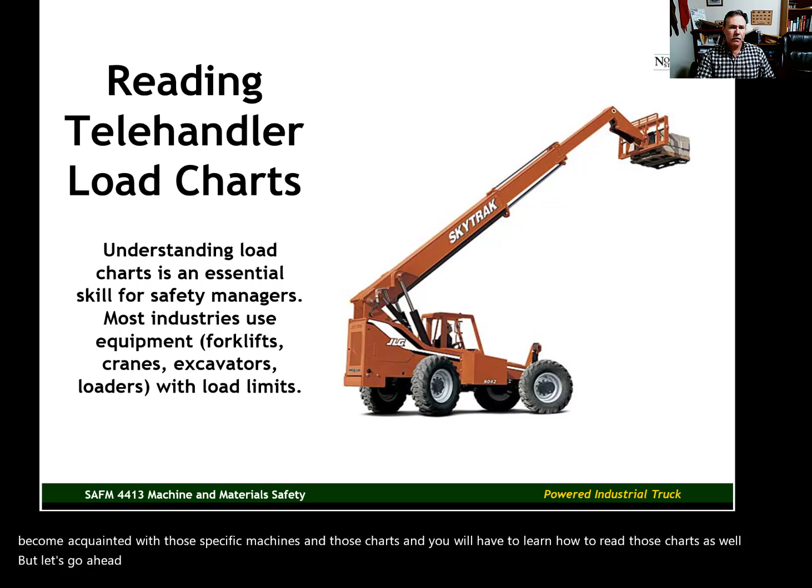Once you're working as a safety manager, you will be around these types of machines, and you will become acquainted with those specific machines and their charts, and you will have to learn how to read those charts as well. But let's go ahead and take a look at the chart for this particular model of forklift.

We're dealing just with the SkyTrak 8042. Different models of SkyTraks will have different charts, and different manufacturers will have different charts. We're just working with the SkyTrak 8042 charts.

The load chart will tell us how much we can lift based on the angle of the boom, how far the boom is extended, what the reach is with the boom, and how high we're lifting the load. These 4 variables determine the capacity of the machine.

We can also use the chart to identify the maximum lift heights or horizontal reach distances with a particular load weight. Now let's say we have 5,000 pounds and we want to know: how high can we lift that 5,000 pound load? How far out can we reach with that 5,000 pound load? We can use the charts to help determine what the limitations are going to be with a particular load weight.

And like I've already said, there are different charts for different machines, but most of them look very similar to one another, and they're used in basically the same way.

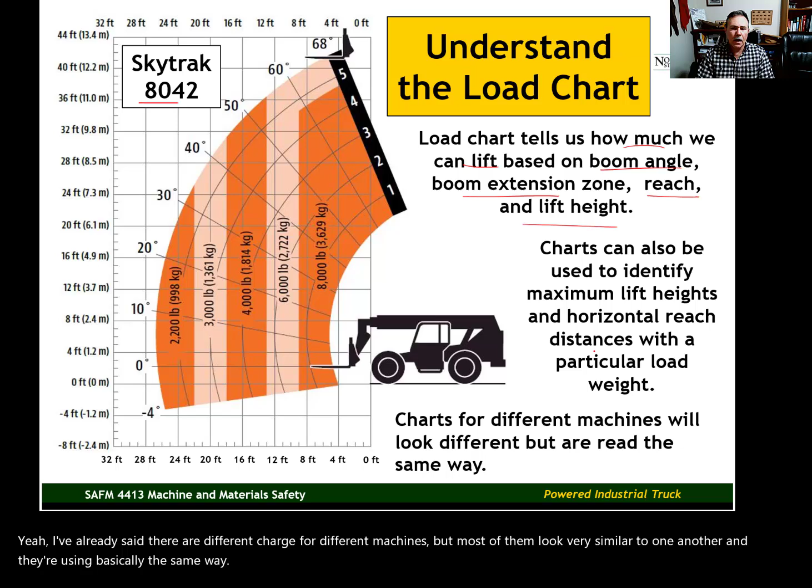Let's take an even closer look at this particular chart and break it down into the different components. In yellow, we have the boom angle—that's the angle of the boom relative to the ground.

The boom angle for this machine can range from 68 degrees maximum all the way down to -4 degrees as a minimum boom angle. A lot of versatility—again, it's -4 to 68 and anywhere between those two extremes. Our boom can be set up anywhere within that range, which makes this a very versatile machine.

The reach of the machine, the scale goes from 0 feet to 32 feet. You don't have that much reach, even though the scale goes out to 32 feet. The maximum reach with this particular machine is going to be about 27 feet. But again, even 0 to 27 feet also makes this a very versatile machine. Anywhere within this range is a workable reach distance for this machine.

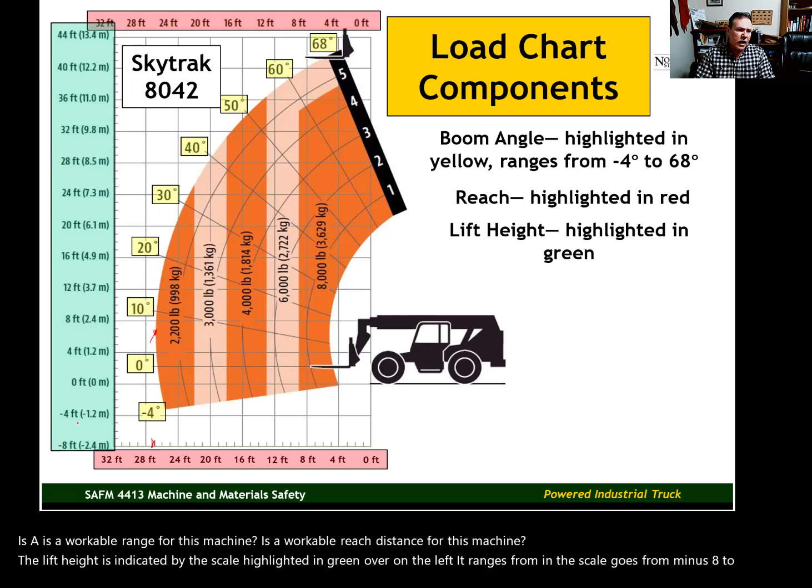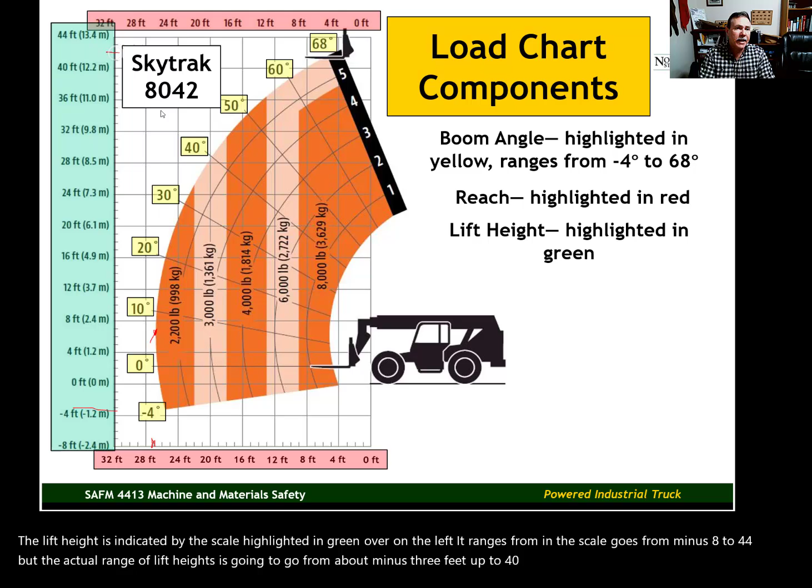The lift height is indicated by the scale highlighted in green over on the left. It ranges from, again, the scale goes from -8 to 44, but the actual range of lift heights is going to go from about -3 feet up to 42 feet. And that's why it's an 8042, because of that 42-foot maximum lift height.

The boom extension zones—there are 5 numbers here, but there are actually 6 zones: zone 1, 2, 3, 4, 5, and zone 6. Six extension zones. And remember, all these different variables affect the load capacities, which are highlighted and circled here in red. These are the different load capacity zones for this machine.

Load capacities can range from 2,200 pounds maximum in this zone all the way up to 8,000 pounds capacity in this zone. You'll notice that the closer you are to the machine, the less the reach is, the greater the lifting capacity. The further you reach out with that boom, the less lifting capacity you're going to have.

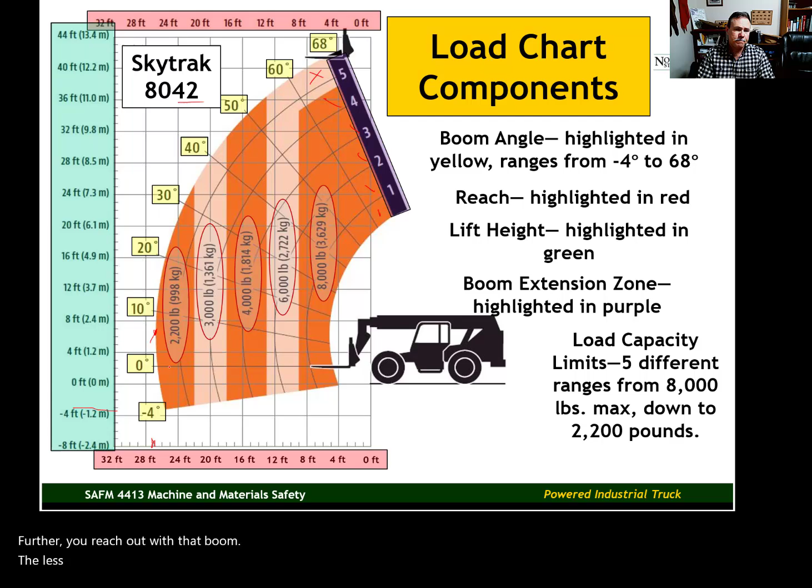Now, these capacity zones are indicated by different shading within the chart. All of this orange here—I can't draw a straight line with this thing, so bear with me—I'll just mark it with X's. That's in the 2,200 pound zone. Then we have the 3,000 pound zone, that's everything in this tan coloration.

Then we have the 4,000 pound zone. We're back to orange shading.

Any configuration that falls within this zone, you can lift up to 4,000 pounds. Then we have the 6,000 pound capacity zone, which includes this tan area up here. If the boom extension, reach, and lift height falls into this zone, the maximum lifting capacity is going to be 6,000 pounds. Again, as we get closer to the machine, we get into the zone here where we can lift up to 8,000 pounds.

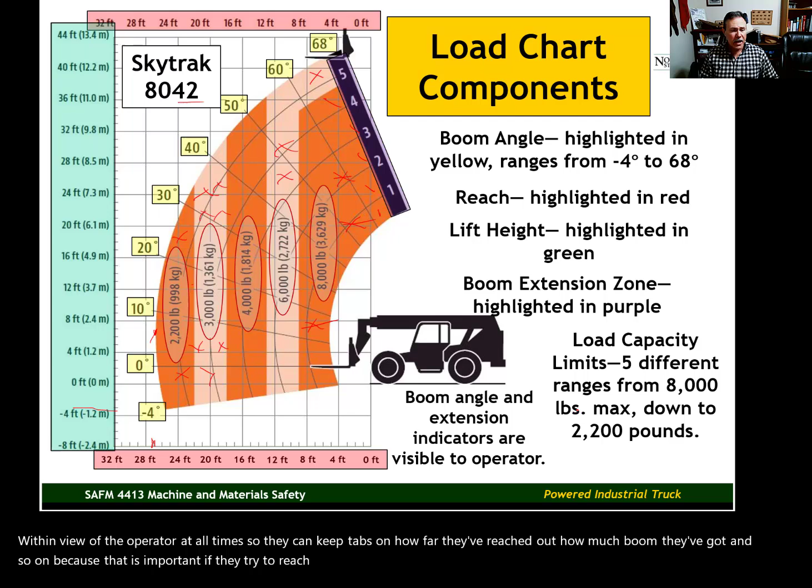Now, the boom angle and the extension, that's very important for the operators to keep track of when they're in the cab of the equipment. The way these things are designed, there will be a boom angle indicator and a reach indicator within view of the operator at all times, so they can keep tabs on how far they've reached out, how much boom they've got, and so on, because that is important. If they try to reach out too far with too heavy of a load, that can cause the machine to tip over.

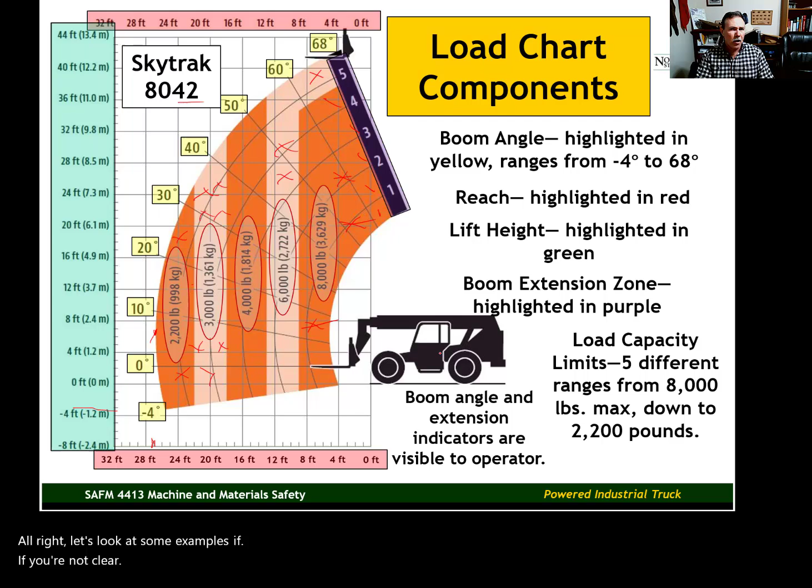All right, let's look at some examples. If you're not clear on anything yet, hopefully the examples will help you out. Our first example.

You are lifting a load to a height of 20 feet. What is the load capacity? Also, we want to know what is your boom angle and boom extension zone. And we're working at a reach of 16 feet. So we have a lift height of 20 feet and we're reaching out to 16 feet. What's our capacity, boom angle, and boom extension zone that we're going to be in? And most important here is that capacity.

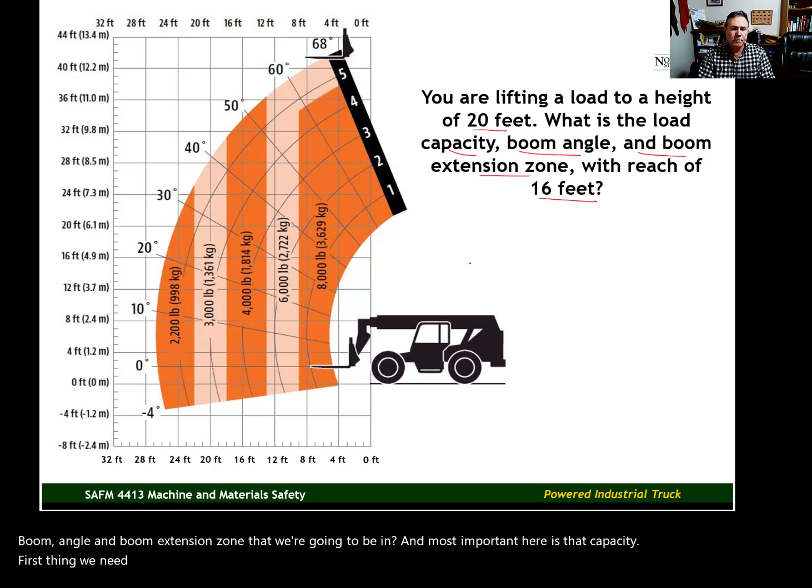First thing we need to do using this chart is identify the line representing a 20-foot lift height. I'm using lines superimposed on the chart to help highlight that line. We got a purple line superimposed on the chart representing a 20-foot lift height. Now we need to find the vertical line representing a 16-foot reach. Here's 16 foot, then we got this green line superimposed on the chart. Now, where these two lines intersect, this is the information we're interested in.

Where those two lines intersect, that's going to tell us what our capacity is, what our boom angle is, and what boom extension zone we're in.

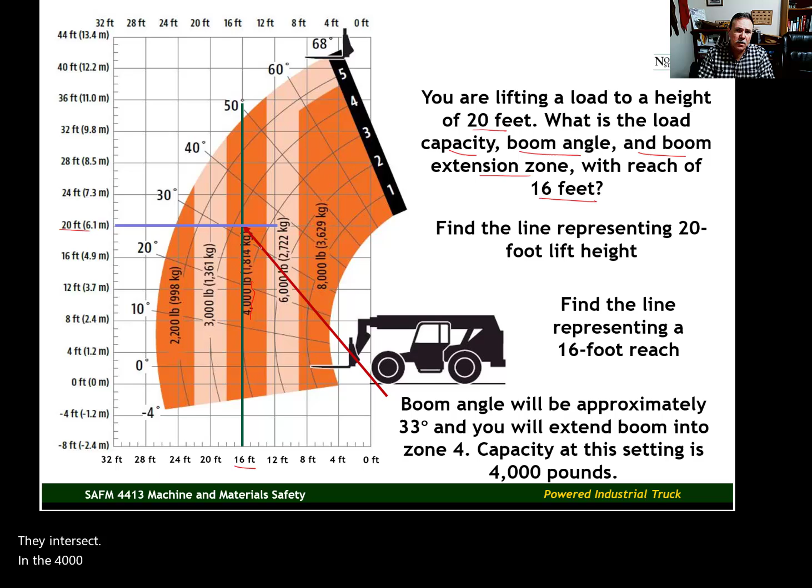They intersect in the 4,000 pound capacity zone. So with this lift height and reach, we can lift 4,000 pounds. Also at this lift height and reach, our boom angle is going to be about 33 degrees. And we are in boom extension zone 4 for this pick. That answers all of our questions.

But again, that capacity for this question is the most important answer we're looking for. How much can we safely lift if we need to lift it up to a height of 20 feet? And if we need to reach 16 feet? Now, one thing about reach, if we could get closer than 16 feet, that's going to improve our lifting capacity. But there are some circumstances in the workplace where the closest you can get will be 16 feet. Or maybe the closest you can get is 24 feet. That's going to limit your capacity. Longer reach, less capacity.

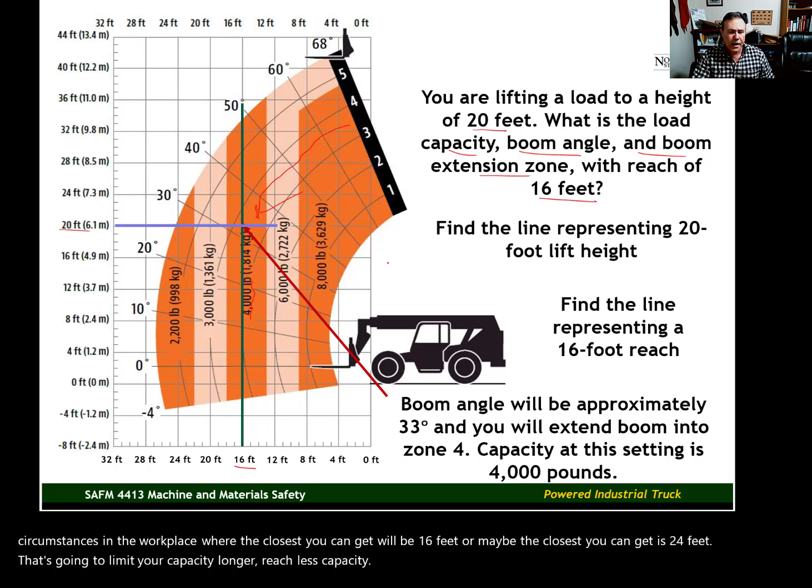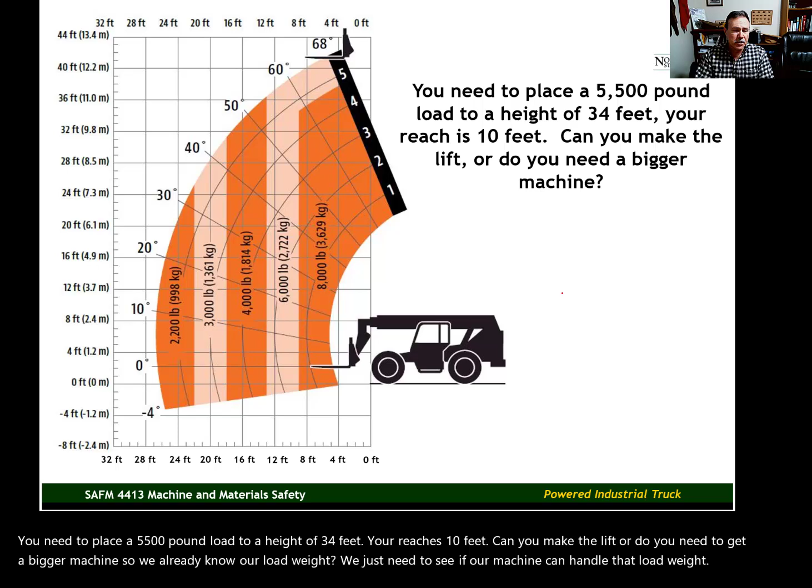All right, let's look at another example. You need to place a 5,500 pound load to a height of 34 feet. Your reach is 10 feet. Can you make the lift, or do you need to get a bigger machine? So we already know our load weight. We just need to see if our machine can handle that load weight with the configuration that we're shooting for. Again, we're shooting for a height of 34 feet and a reach of 10 feet. Can we make the lift?

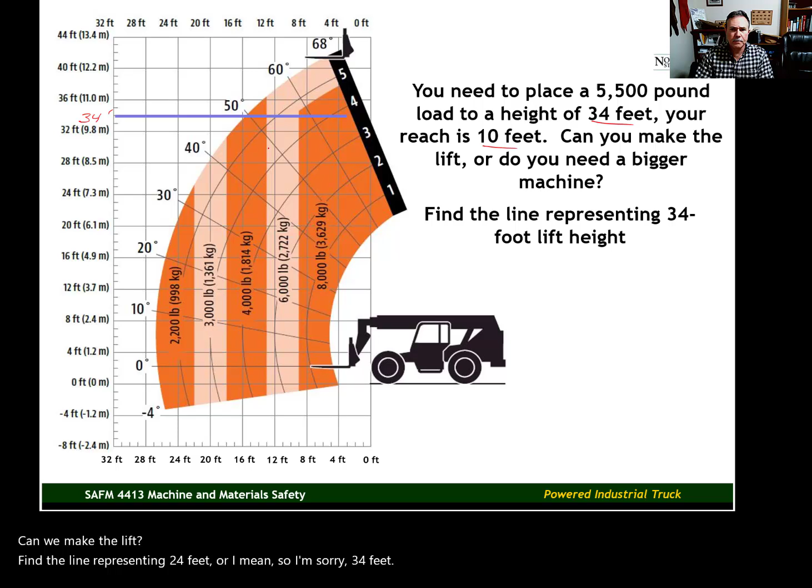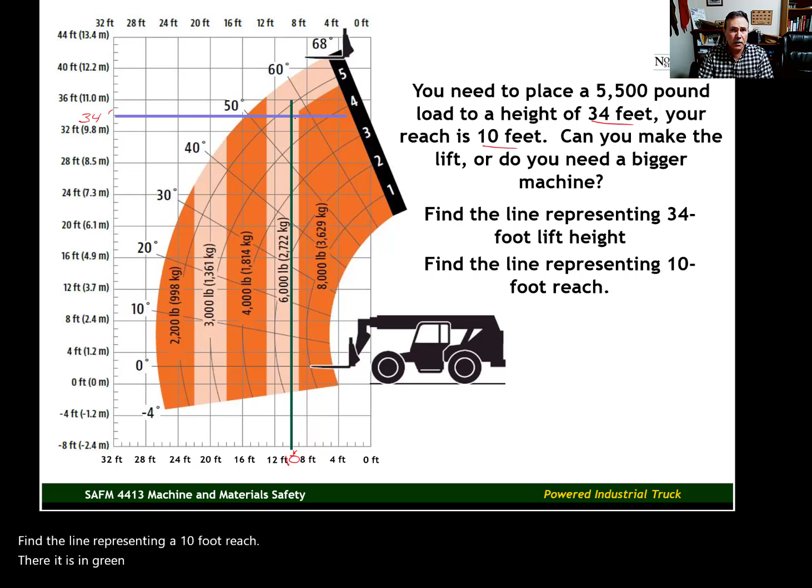Find the line representing 34 feet. There it is in purple. Find the line representing a 10-foot reach. There it is in green. Again, where those two intersect, that tells us what our lift capacity is going to be. And it looks like we're right there in that 6,000 pound capacity zone. So we're good to go. We can lift that 5,500 pound load up to a height of 34 feet with a reach of 10 feet.

Now, one thing we need to be aware of, though, if our reach extends beyond 10 feet, we're going to lose capacity. Or if we try to go to, actually with this particular configuration, you've got a lot of wiggle room. You can go all the way up to a height of about 38 feet, it looks like. And you can go all the way out to a reach of about 13 feet and still be in good shape.

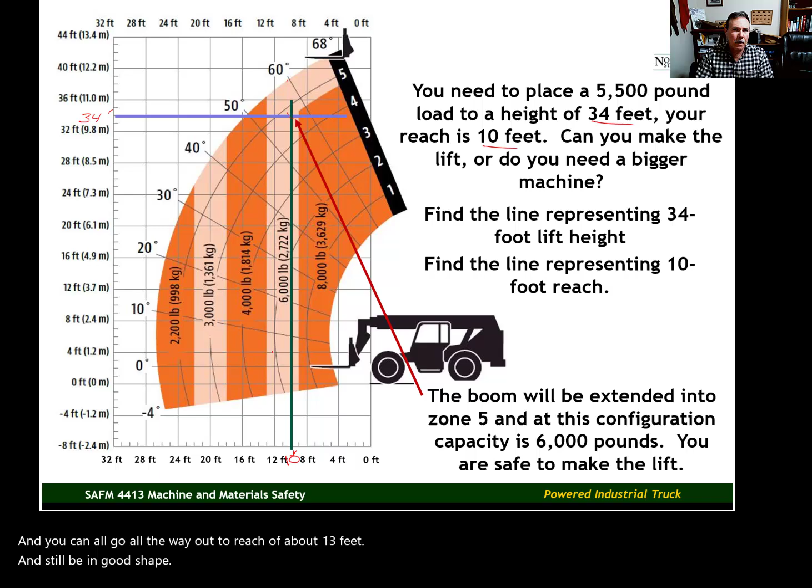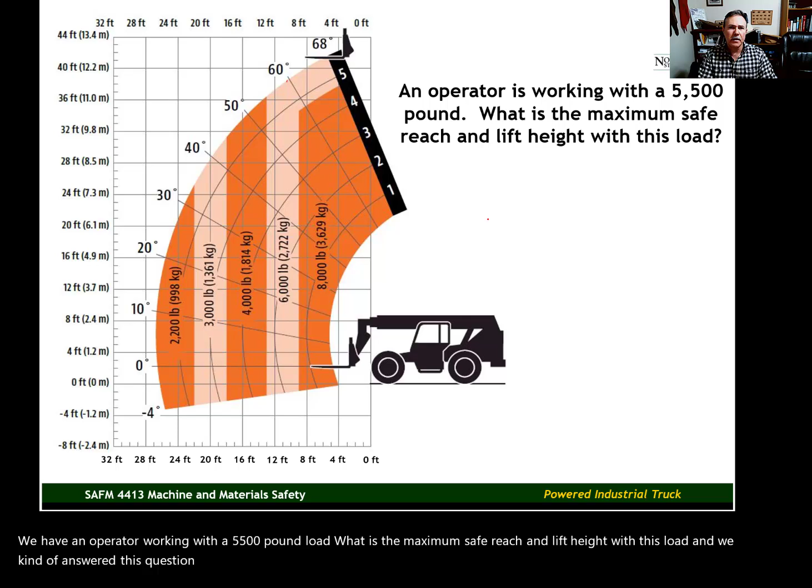We kind of answered this question with my comments made previously. The operator needs to stay in the 6,000 pound capacity zone. There's not a 5,500 pound capacity zone, it goes 4,000, 6,000, 8,000. We need to be in that 6,000 pound zone to lift this 5,500 pound load. So find the maximum reach which keeps the lift in the 6,000 pound zone. That's going to be right at 13 feet.

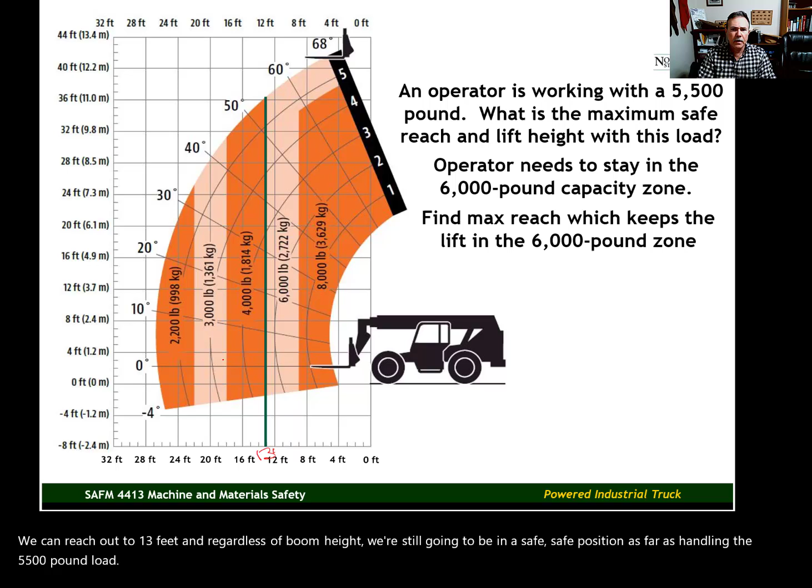We can reach out to 13 feet, and regardless of boom height, we're still going to be in a safe position as far as handling the 5,500 pound load. Now we need to find the maximum lift height at that reach. The maximum lift height at a 13-foot reach is 36 feet. At 36 feet and 13-foot reach, we're still in the 6,000 pound capacity zone. If we go beyond 13 feet, we could tip the machine. If we try to go higher than 36 feet, we could tip the machine.

Now remember, any of this white area out here, outside of these shaded areas, means no go. You can't lift in those areas, the machine has no capacity there. If you try to push the machine into those no-capacity areas, that's when the risk of a tip over is at its greatest. That's when you're really pushing the limits of the machine, and you're at risk of tipping the machine or having another incident occur.

Again, our maximum reach with 5,500 pounds is 13 feet, and maximum height with 5,500 pounds is 36 feet. It all goes back to that intersection point where the horizontal line and the vertical line intersect.

Now, when you're working with these charts, you're not going to be able to draw lines on them. A lot of times the charts are mounted inside the cab of the equipment, that's where they should be, at least. Again, you're not necessarily going to be able to draw on them. But one thing I've found that's a real handy tool for reading these charts is a couple of straight edges. You have one straight edge to identify the horizontal line, and one that's perpendicular to represent the vertical line. Two rulers or two pieces of paper can be used as a straight edge to help identify that intersection point.

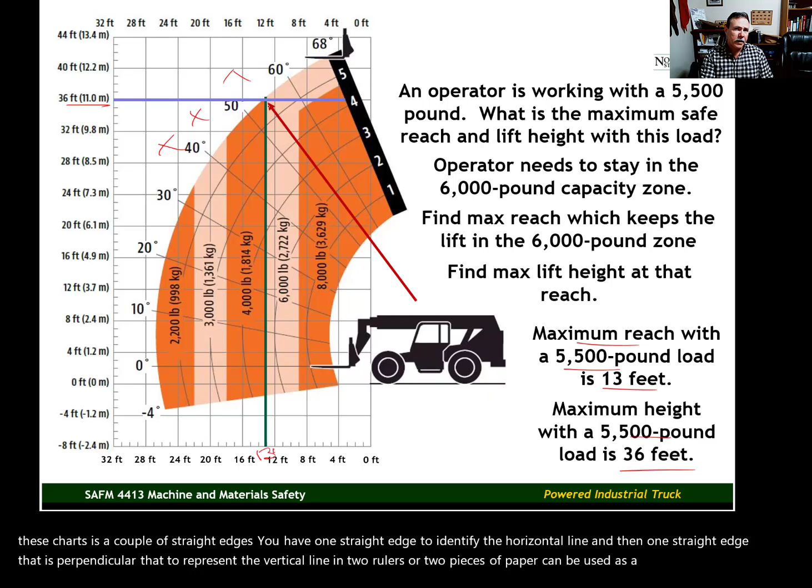All right, another example. An operator needs to move a load from a height of 17 feet to the ground. So sometimes you're not lifting from the ground up to a certain height, maybe you need to take a load that's already up high and put it on the ground. The charts work either way.

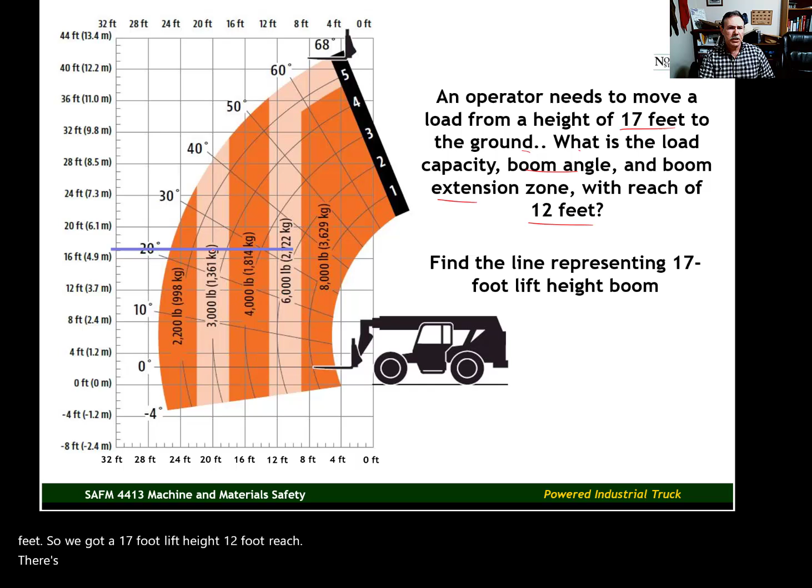With this situation, we want to know the load capacity and boom angle and all this other information if our reach is at 12 feet. So we've got a 17-foot lift height, 12-foot reach. There's our line representing the 17-foot lift height, and there's the line representing our 12-foot reach. Where those two intersect, right there in the 6,000-pound capacity zone, we can lift up to 6,000 pounds with that configuration. Again, we're in zone 3, and our boom angle's going to be in the neighborhood of about 32 degrees.

Maybe 33, 34 degrees, but the capacity is the most important number there. That's how heavy we can go in that particular configuration. Another sidebar I want to mention, what makes these machines tricky: that extendable boom, you can think you're safe. You think, well, I'm only going to 17 feet with a 12-foot reach. But let's say you get up there and decide, oh, I want to extend on out to, say, a 24-foot reach. With the extendable boom, it allows you to do that, you can change on the fly. It's not like you're programming a computer and it's going to stop at 17 feet. The operator can go out to a greater height if they decide to, for whatever reason.

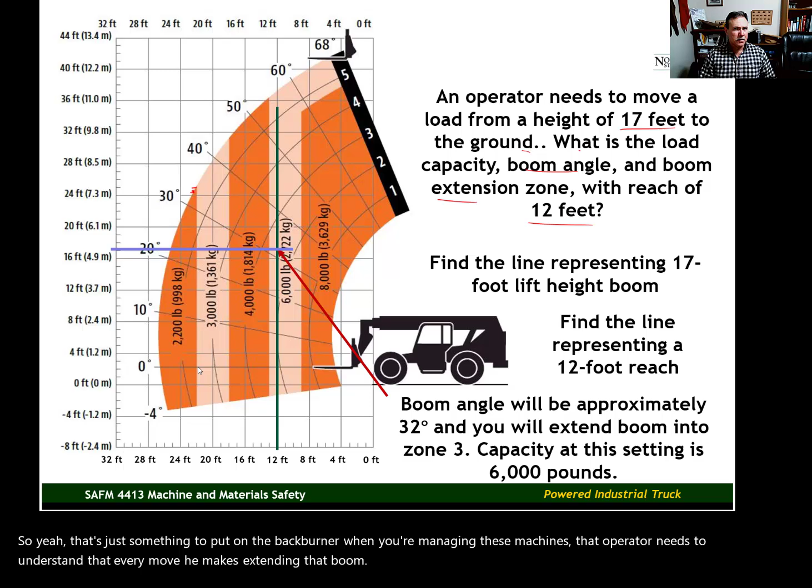That operator needs to understand that every move he makes extending that boom will affect the load capacity of the machine. Another example.

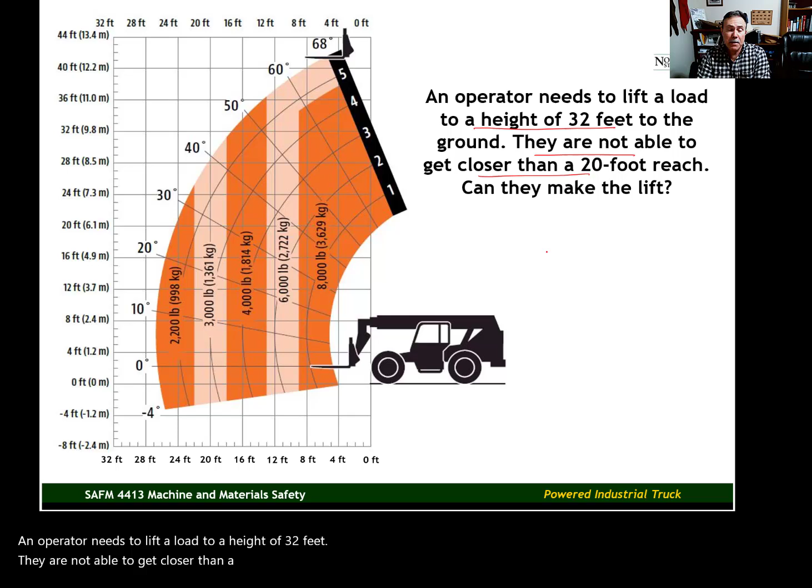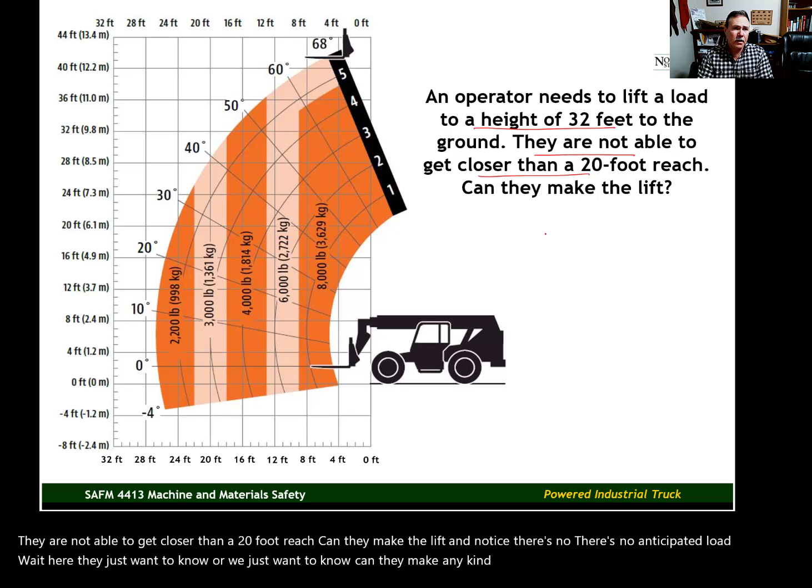An operator needs to lift a load to a height of 32 feet. They are not able to get closer than a 20-foot reach. Can they make the lift? Notice there's no anticipated load weight here. They just want to know, can they make any kind of lift at that configuration? Again, 32-foot height and 20-foot reach.

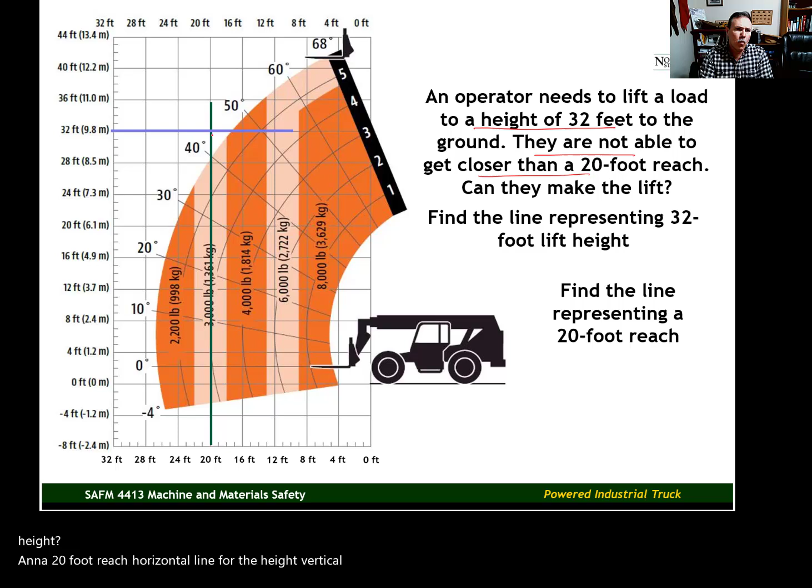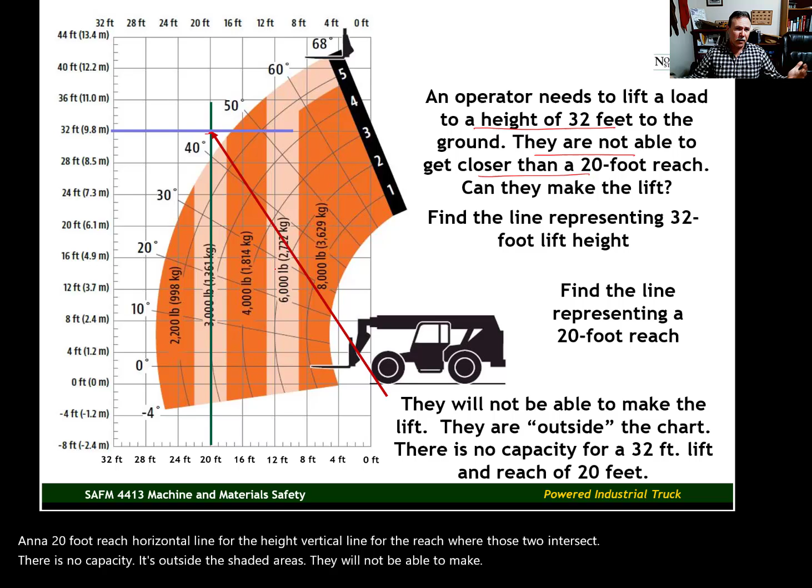Horizontal line for the height, vertical line for the reach. Where those two intersect, there is no capacity. It's outside the shaded areas. They will not be able to make the lift. They're not going to be able to lift anything. They can't lift a lunchbox up to that height because it's outside of the machine's capabilities. That particular configuration is outside the machine's capabilities.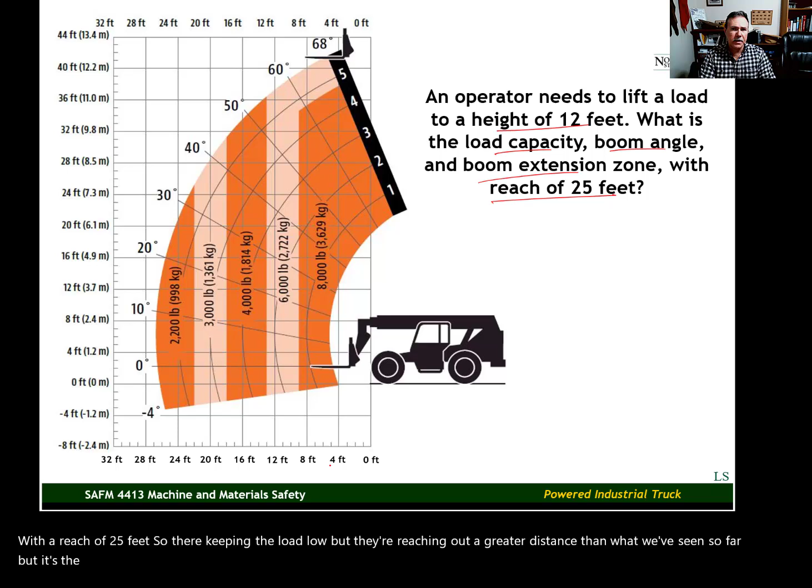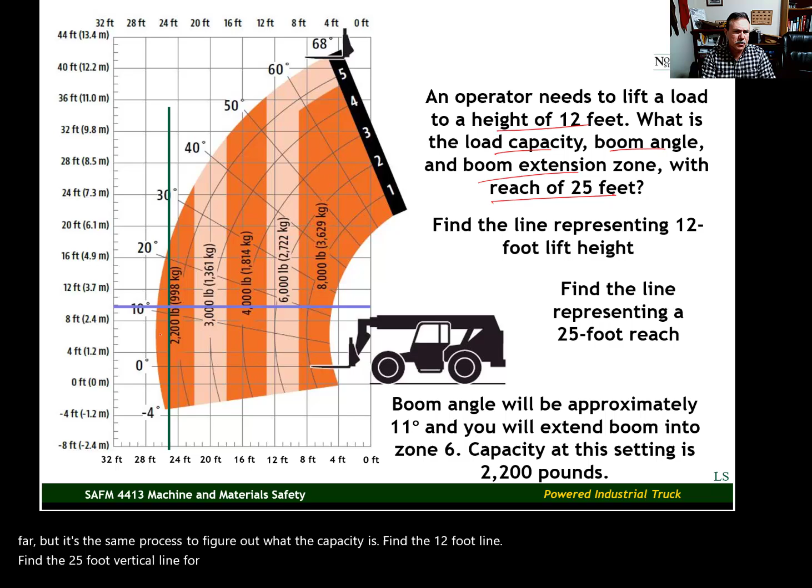Find the 12-foot line. Find the 25-foot vertical line for reach. Where those two intersect, they're in the 2,200-pound capacity zone. They can make the lift, but they're only going to be able to lift up to 2,200 pounds. And their boom angle is going to be at about 11 degrees.

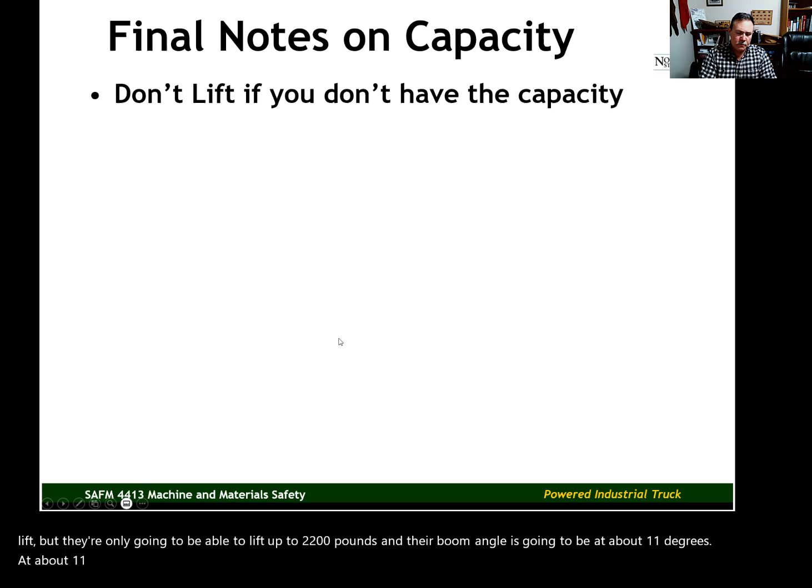At about 11 degrees. This pen is so finicky. There we go, about 11 degrees. I won't try to write it in. That doesn't seem to work.

And I'm in zone 6. Again, there's 5 numbers over here, but there's actually 6 zones, numbered 1 through 5. Important number again is the capacity, 2,200 pounds.

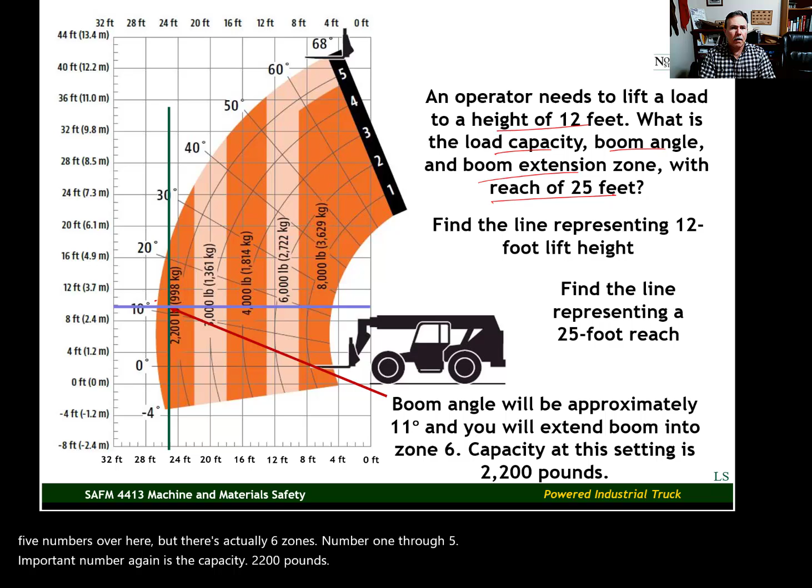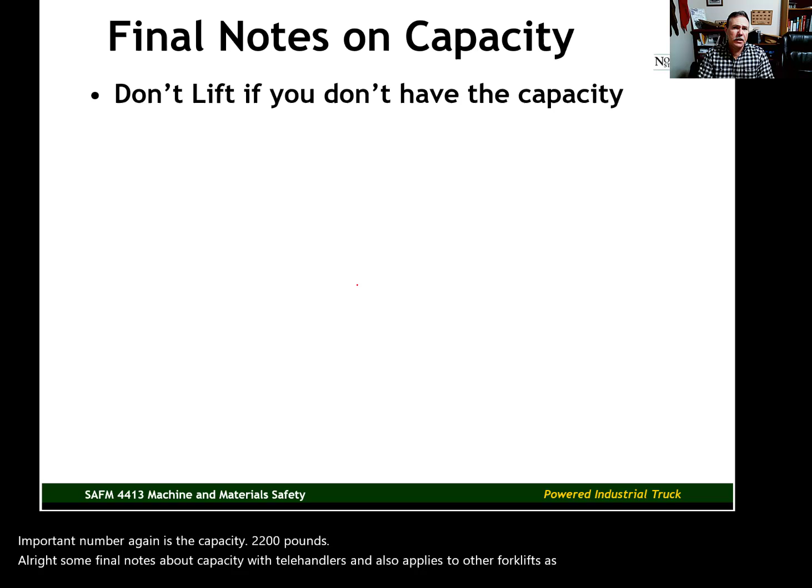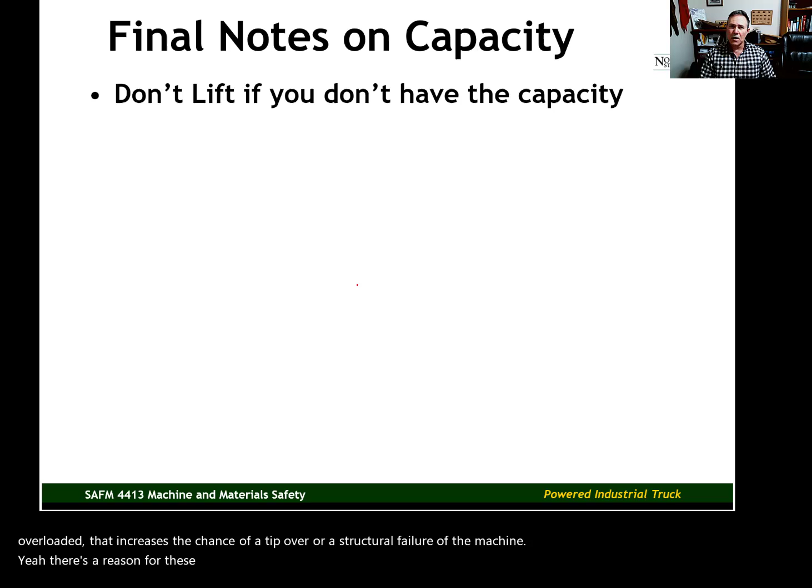All right, some final notes about capacity with telehandlers, which also applies to other forklifts as well. Don't lift if you don't have the capacity. Don't try to make a lift if the machine is overloaded. If you make a lift and you're overloaded, that increases the chance of a tip over or a structural failure of the machine, and there's a reason for these limits. Don't exceed those limits. Don't allow operators to exceed the limits, and make sure they understand the limitations, why those limits exist.

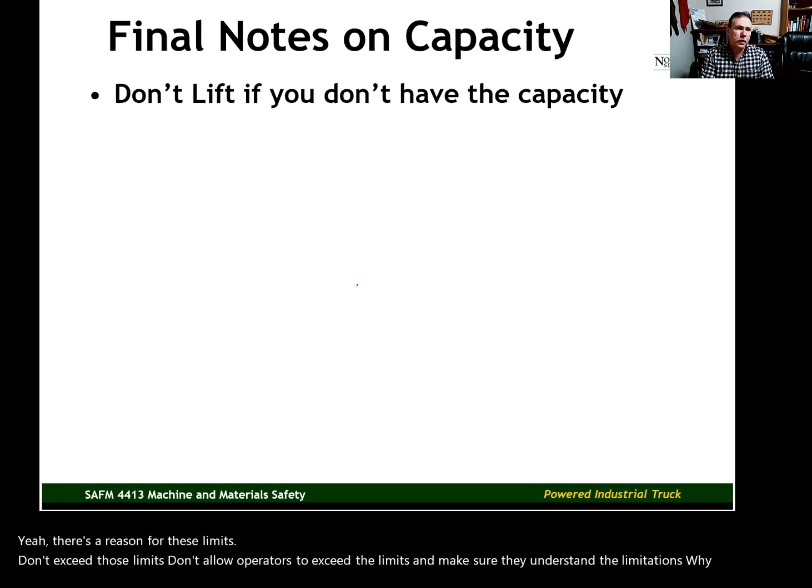If you don't have enough capacity for what you're trying to do, you do have options. Maybe you can bring in a bigger machine, or maybe you break down the load. Maybe it's a pallet of bricks and you don't have enough capacity to lift all the bricks at one time. Well, you remove half of the bricks and you make the lift in 2 separate operations, 2 separate executions. So there are options if you're overloaded.

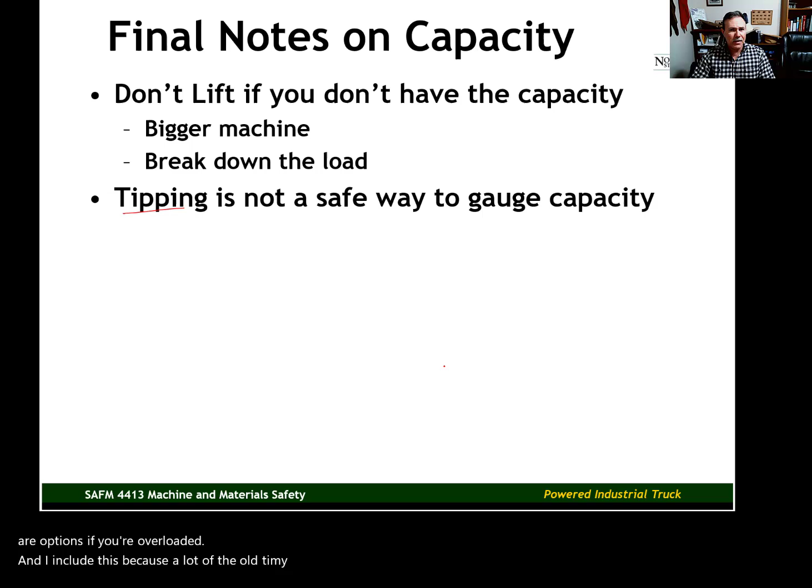I include this because a lot of the old-timey operators have this idea that you're safe until you start tipping. Tipping is not a safe way to gauge the capacity of a forklift or any type of lifting machine. If you are at the tipping point, you have already exceeded the working load limit of the machine. And when you're at the tipping point, there's a very good chance that the machine will continue tipping and you're not going to be able to stop it. Again, that sounds like a common sense, no-brainer thing, but you will run into older equipment operators that firmly believe that is how you determine the lifting capacity.

It's a by-the-seat rule. You're lifting by the seat of your pants. When you feel it starting to get light in the seat of your pants, that's when you stop. But there will be operators that you encounter that you have to retrain away from that mindset, and honestly, some of them you'll never get completely retrained. If they've been doing it 20, 30, 40 years, it's hard to teach an old dog new tricks in those situations with those types of personnel.

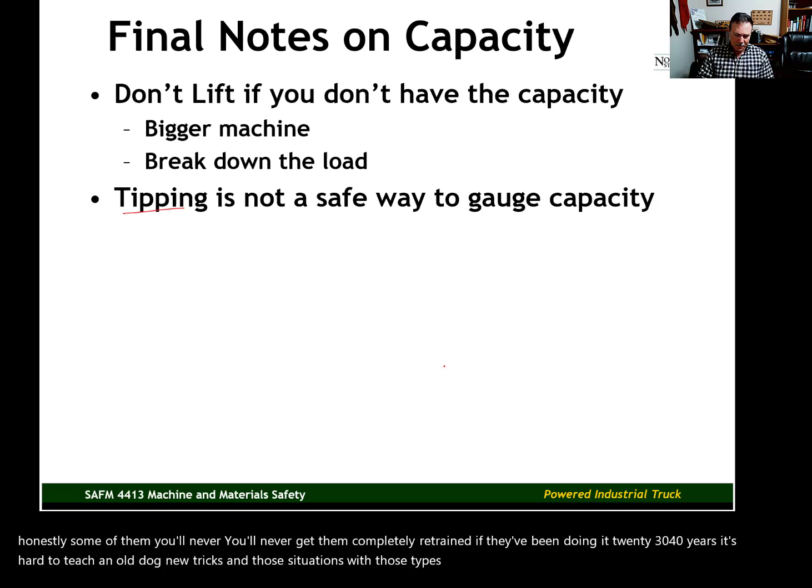Again, I've already hit upon this pretty extensively. Every model of machine will have different charts and different capacities. You can't take one chart and use it with another machine. Keep that in mind.

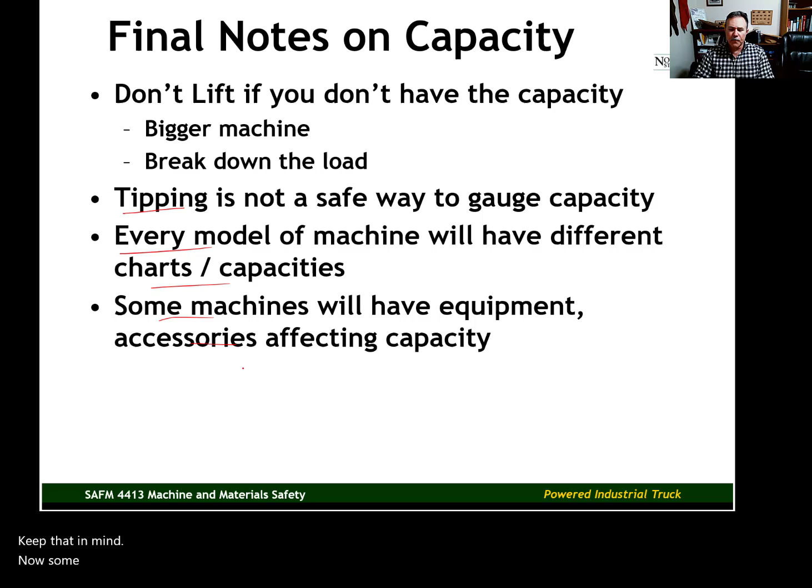Now, some machines - and we're not getting into this with forklifts, we'll talk a little bit about it when we talk about cranes - but machines can have different types of accessories, different types of grapple hooks or buckets or lifting mechanisms. Those accessories will affect capacity of the machine. You need to keep that in mind if you have operators using a machine with certain types of accessories. And like I say, I'll really illustrate that when we talk about lifting with mobile cranes.

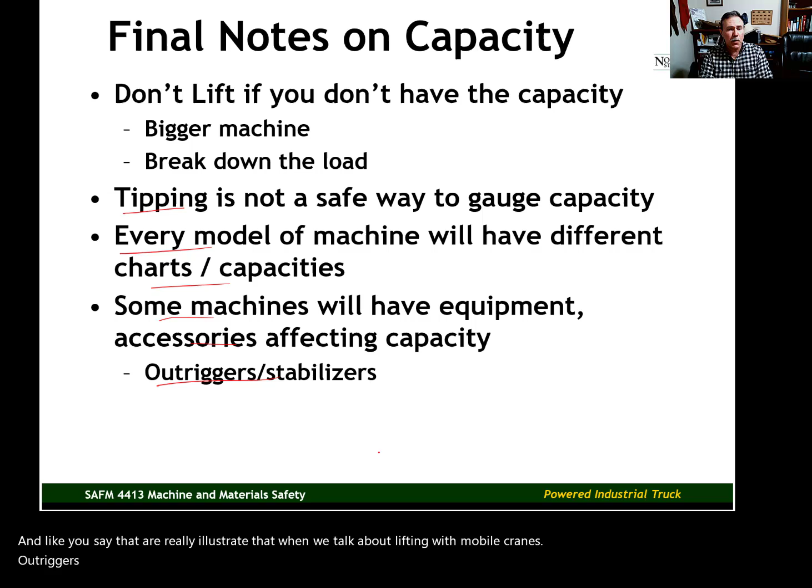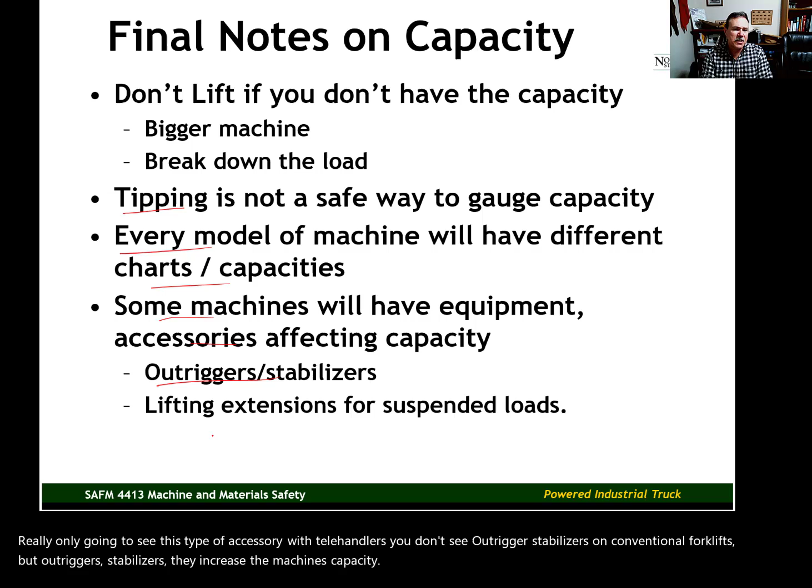Outriggers, stabilizers, is one example of an accessory that affects capacity. These outriggers or stabilizers affect capacity in a positive way, and you're really only going to see this type of accessory with telehandlers. You don't see outrigger stabilizers on conventional forklifts, but outriggers, stabilizers, they increase the machine's capacity. Also, another example would be lifting extensions. Lifting extensions reduce the machine's capacity.

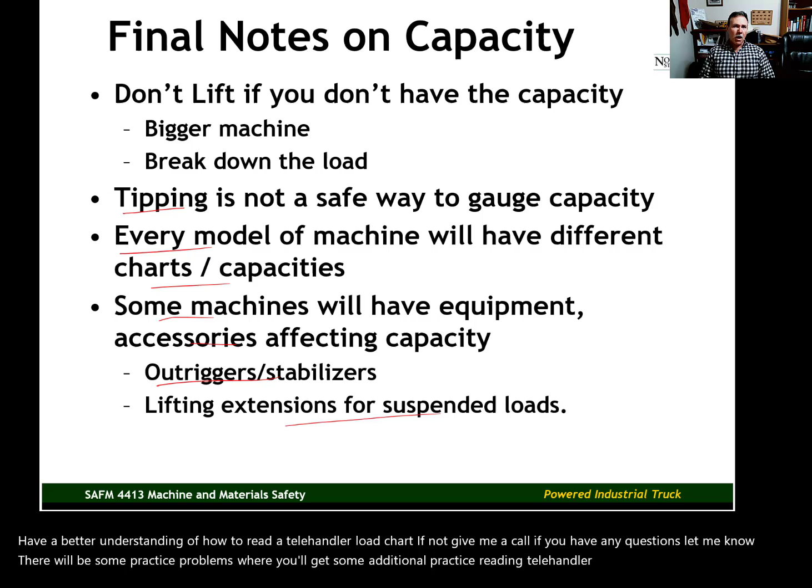All right, well, hopefully you have a better understanding of how to read a telehandler load chart. If not, give me a call. If you have any questions, let me know. There will be some practice problems where you'll get some additional practice reading telehandler load charts. All right, have a good day, and I will see you in class.